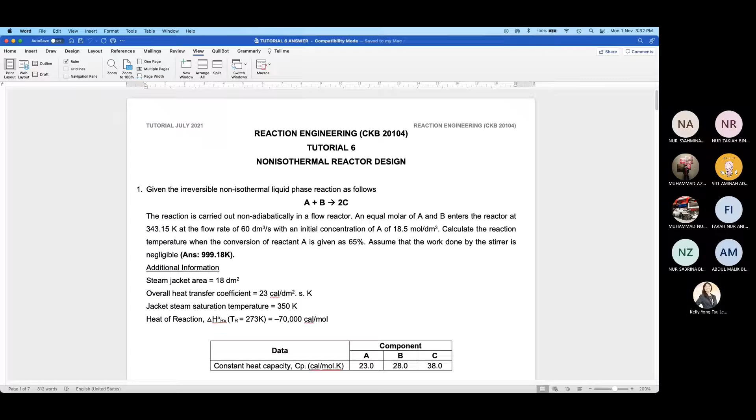This is supposed to be the last tutorial because this is the last chapter with a tutorial. We still have 2 more chapters for me to cover, but chapter 7 and 8 you don't have any tutorial. So this will be the last tutorial, which is tutorial chapter 6.

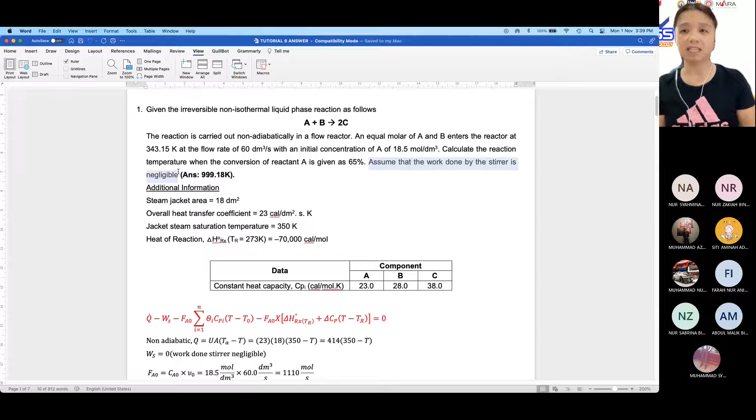Then they say assume work done by stirrer is negligible. As I told you, in the energy balance equation there's a part for work shaft, which refers to the work done by the stirrer. But most of the time the work done is relatively small compared to the other variables, so most of the time work done by stirrer, WS, we consider as zero or negligible.

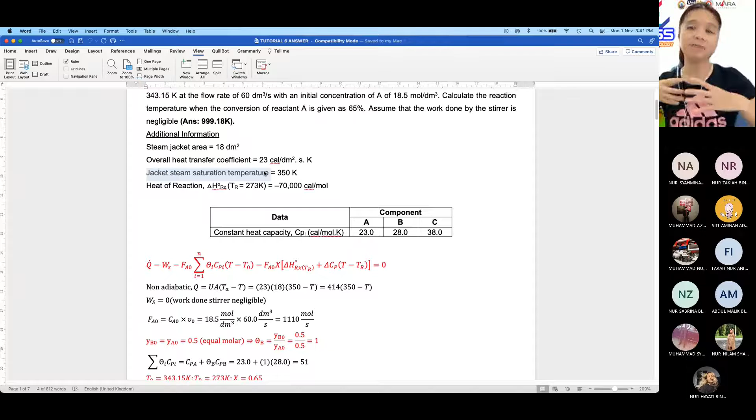Next, heat of reaction. As I've told you before, every reaction will have what we call heat of reaction. Heat of reaction depends, it can be negative or positive, depending on whether it's endothermic or exothermic reaction. So if you see the value of heat of reaction is negative, don't be surprised, it means in this reaction it's exothermic. If it's endothermic, the heat of reaction is positive.

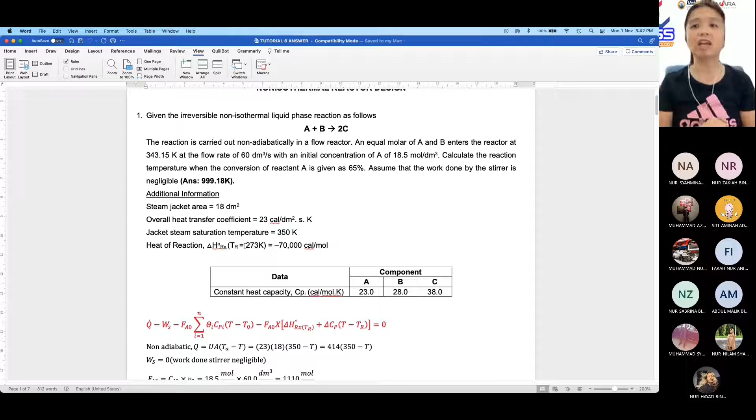And then they give us heat capacity, heat capacity A, heat capacity B, heat capacity C. So how do we solve this question?

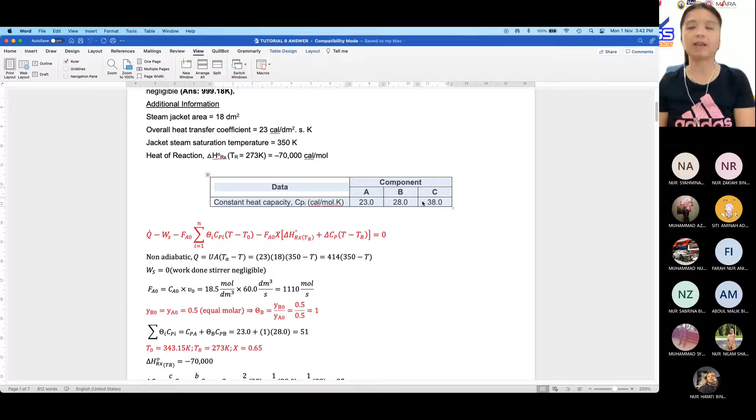As I always tell you, sometimes when you look at reaction or any other engineering subject, the challenge is we don't know where to start, which is very normal. As I said, you need to always know what equation is related, that will be your starting point for how you want to calculate. Especially for reaction questions there's a lot of information, so it becomes very confusing when you don't know what this information is for. So always focus on what they want to find.

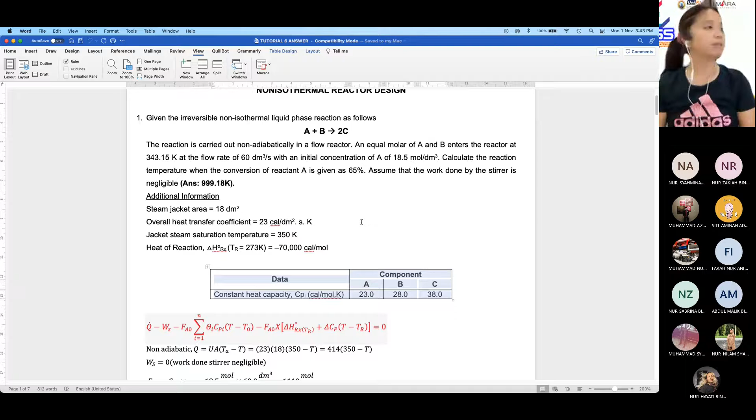And if you realize, in chapter 6 there's only one equation, which is our energy balance equation given in this red form. So let's say you guess this should be the equation. Then after you write the equation, remember what it's asking for - it wants the reaction temperature, T.

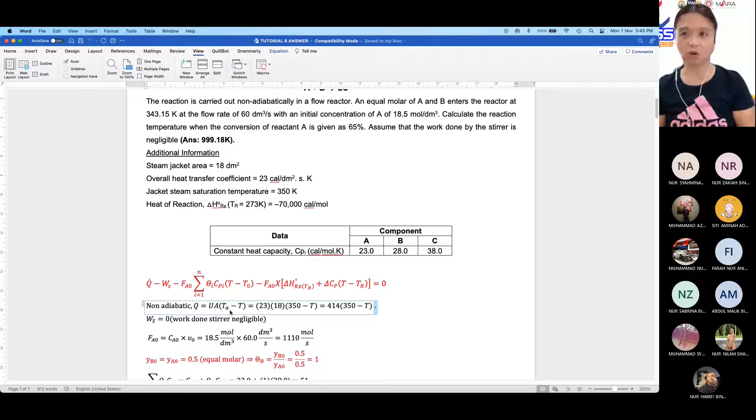U is our heat transfer coefficient of our steam. A is the steam jacket area. T is the reaction temperature. So that means we know U is 23, A is 18, TA is 350 - the jacket steam saturation temperature is our TA. T we don't know, T we need to find - the reaction temperature. So we leave T as it is.

So if you wonder why it's UA in bracket TA minus T - why heat transfer fluid temperature minus reaction temperature - it's because heat transfer is never 100% efficient. So let's say you want your reactor temperature to be 100 Celsius - your heat transfer fluid won't also be exactly 100 Celsius. It will definitely be slightly higher, because there will be loss of heat or loss of energy. So the heat transfer fluid temperature will always be higher than the reaction temperature that you targeted or want to know.

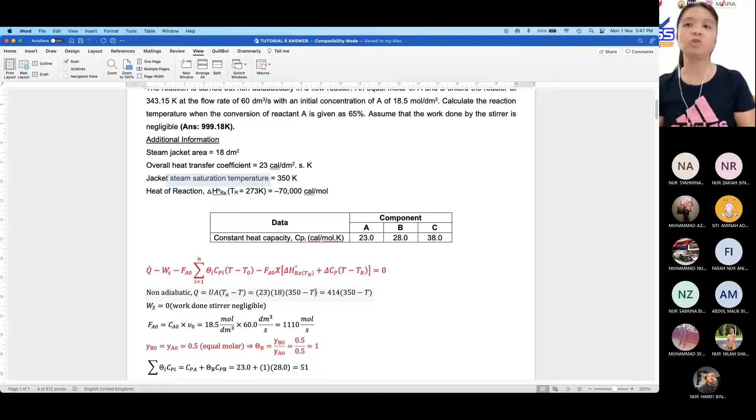So if I were you, I would solve certain parts first, but I would not open the bracket. I understand that sometimes we tend to open the bracket, but if I were you, don't open the bracket first - leave it. Leave the Q part in this form first.

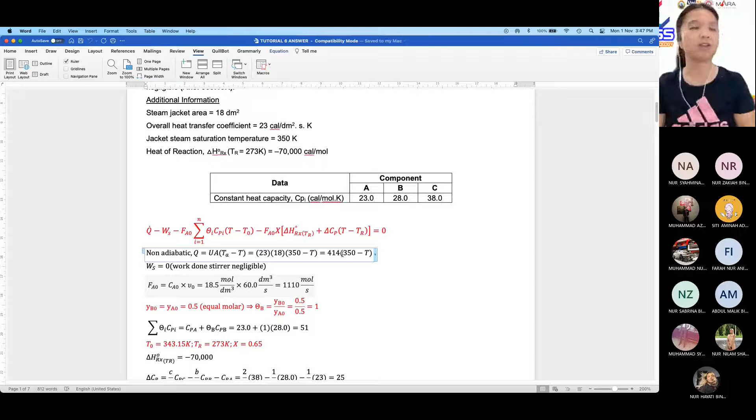So then next, WS - work done by stirrer in this case is negligible because the question says it's negligible. So WS is 0. But even if it's not negligible, in the question, if I were to set a question, I would just give you the value straight away. There's no calculation, no equation to calculate WS. So next, FA0.

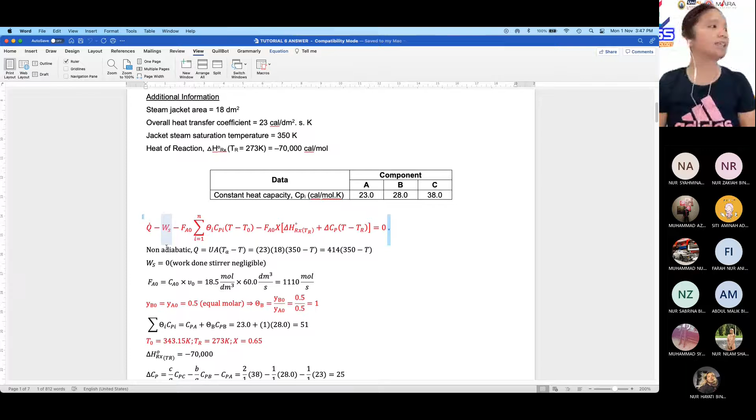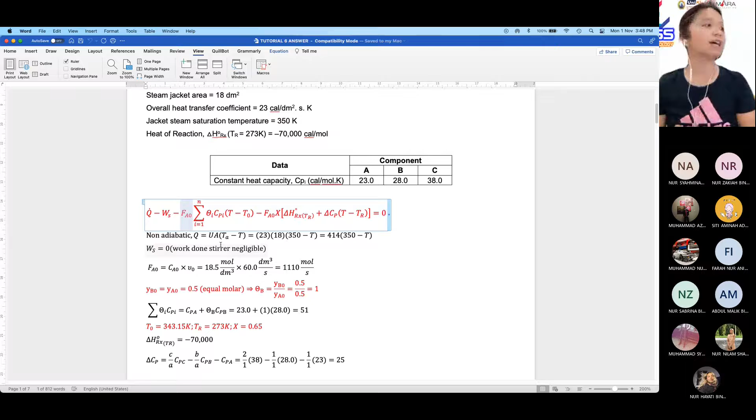FA0 dia tak bagi straightforward kan, dalam soalan dia tak beri kita molar flow rate A. However, I can still find molar flow rate of A, initial molar flow rate of A, if I know Ca0, initial concentration of A, which I'm given 18.5. I'm also given inlet volumetric flow rate, which is 60. So kalau tak tahu FA0, but kita tahu Ca0, kita tahu V0, we can still calculate FA0. So you will get 1110 mole per second. So done.

Okay, so kita kena pergi part by part, right? So next one, summation theta I CPI. I kecil tu referring to the species. Kejap saya buat besar sikit, macam kecil sangat lah. Okay, so this I, summation theta I CPI, the I is not referring to inert, it's referring to the species.

Okay, I itu merupakan species yang ada dalam your reaction. However, you can remember, to calculate theta I CPI is only for reactant only, for the species of reactant, and if you have inert. You don't need to include product in the calculation of theta I CPI.

But let's say you are confused, nak kena masuk ke tak pernah masuk, kamu just ingat, saya selalu ajar kamu pasal theta kan, we use a lot of theta in calculation kan, biasanya kita cari theta B, kita cari theta inert. Okay, either theta B ke theta inert pun konsep dia adalah initial amount. Kalau theta B, initial amount of B over A. Kalau theta inert, initial amount of inert over initial amount of A.

So maksudnya dia sentiasa akan melibatkan initial amount. So kalau produk, kamu dah tahu konsep logik, initially takkan ada produk kan, hanya ada reactant dan kalau ada inert. So you straight away know calculation theta I CPI ni only refers to reactant and if you have inert.

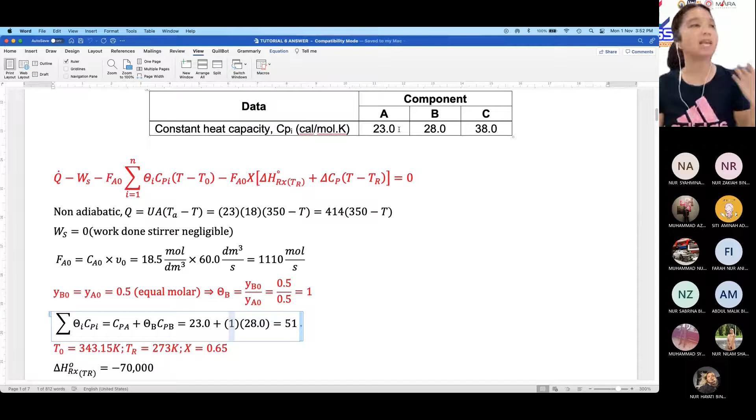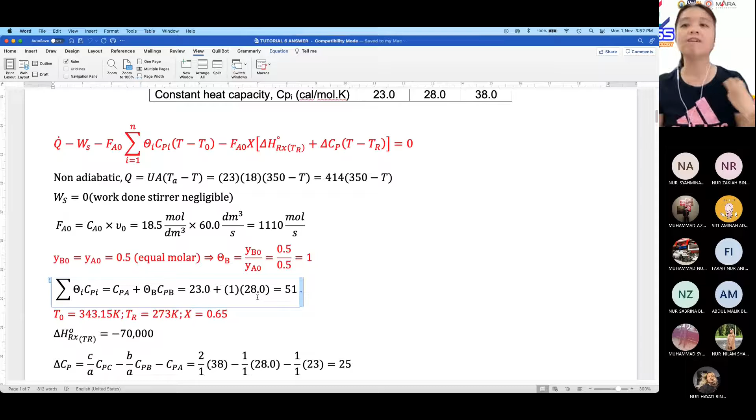So we know that we can replace theta B as 1 and then we write heat capacity of B. Mana dapat? Daripada table lah. So daripada table we see, right? Cp for A is 23. Heat capacity at constant pressure, CPA is 23, CPB is 28. So that's why we put it as 23 plus 28. So theta B to be very careful. Sometimes we might make some mistakes when we want to calculate the value. Okay, so done on summation theta I CPI, done.

Okay, then next, dalam bracket T minus T0. So T kita nak cari. So T tu kita biarkan. T0 is the inlet temperature, which is feed temperature, which is 343.15 Kelvin. So done. Okay, so belakang pula minus FA0, kita dah calculate tadi. FA0 we already know. X given as 0.65, 65%. So X kita dah tahu.

Alright, so next is delta bracket heat of reaction at reference temperature. So heat of reaction dalam soalan ni, you are very lucky we are given straight away. So kita ganti terus, negative 70,000.

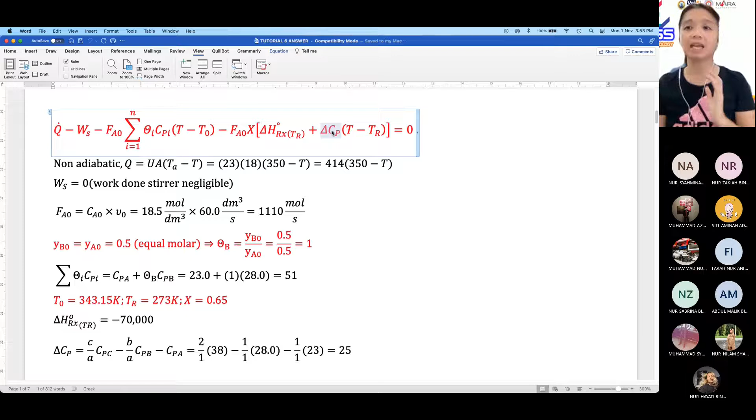Dan last part, delta CP. Delta CP ni kamu jangan lupa, delta dalam matematik tu means changes. Saya always associate, kalau changes tu mesti ada perubahan, perubahan tu mesti ada positif, mesti ada negatif. So positive tu always refers to product, negative always refers to reactant. Whenever you got calculation and you are confused, plus atau minus, bila ada product dengan reactant, you just remember product mesti positif, reactant mesti negatif.

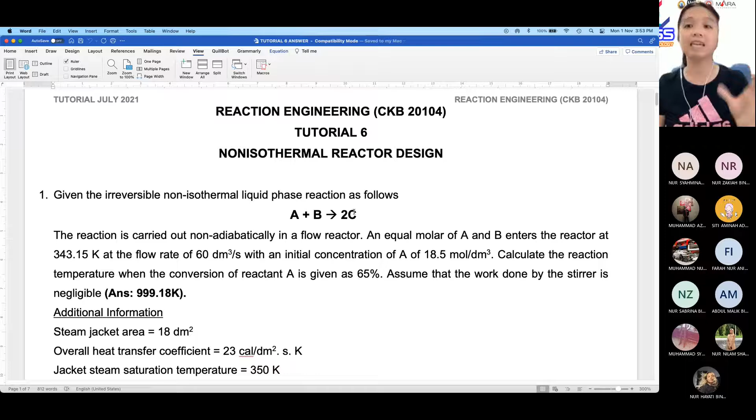Meaning delta CP is written as, jangan lupa stoichiometric coefficient punya ratio tu kena ada. So C per A, heat capacity of C. Dalam kes kita ni produk dia C, reactant dia A and B. So C per A, heat capacity of C, minus B per A, heat capacity of B, minus A per A, heat capacity of A, just like A per A itu 1.

Then don't forget, kenapa negatif untuk B? Sebab B is a reactant in this example. So untuk case B ni yang kamu kena betul-betul tengok. Kalau B tu adalah produk, dia jadi positif. Kalau B adalah reactant, it becomes negative. So that part yang you have to be a little bit careful.

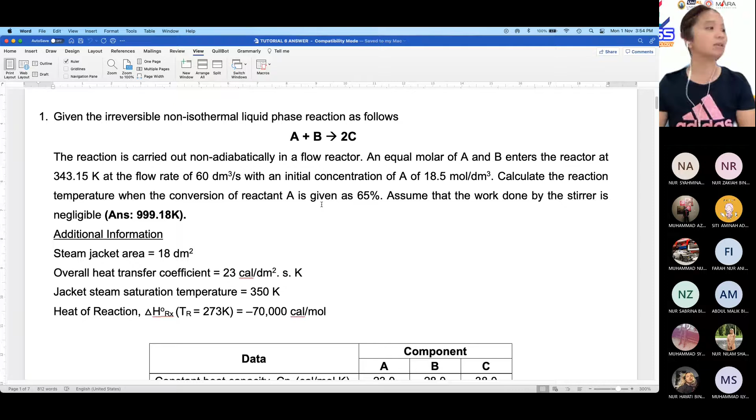Okay, then you calculate accordingly, please check your stoichiometric coefficient. Contohnya dalam kes ni, C per A kita adalah 2/1 because in the equation, A reacts 1A, 1B and produces 2C. So C per A kita sebenarnya adalah 2. Okay, the rest tengok heat capacity A, heat capacity B, heat capacity C.

Now that you have known every unknown, setiap unknown ni kamu dah solve kecuali temperature, then only you substitute into the main equation. So kamu kena solve equation ni. Nanti bila kamu ada masa, please practice on your own sebab equation ni pun dia ada banyak bracket, sub bracket, and so you have to be very very careful.

Lagi-lagi dia ada negatif, dia ada positif. So sometimes if you are not too careful, you might make mistakes, and students tend to make mistakes bila dikira part ni. So rugi lah, kamu dah tahu semua benda tapi kamu terkira salah, you dapat nilai yang salah, it's a bit rugi sebenarnya in my case. Okay, so ultimately you get the temperature as 999.18 Kelvin.

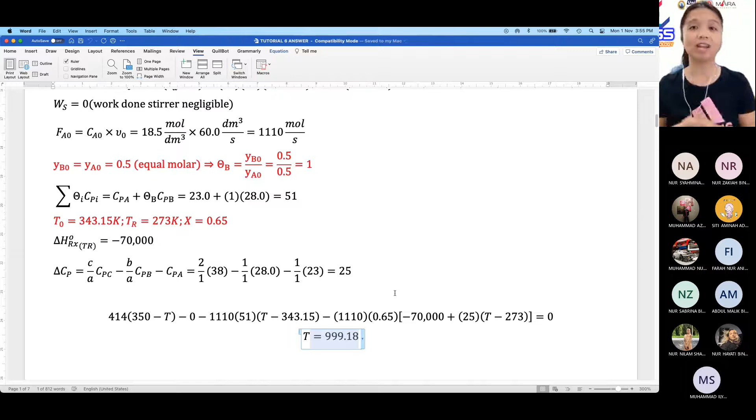Okay, so done for question number 1. Question number 1 is straightforward, dia just guna energy balance equation. Kita tak libatkan lagi sebarang design of reactor, just the change of temperature.

Okay, let me go to question number 2. Question number 2, the endothermic liquid phase reaction, A plus 2B. Be careful now, it's reacting between 1A, reacting with 2 of B to produce 1C. This is carried out in a single steam jacketed CSTR with an inlet temperature of 300 Kelvin.

Dia kata inlet temperature, tindak balas kita ni inlet temperature dia 300 Kelvin. Inlet of feed means the same, suhu sebelum tindak balas berlaku, which rises to 600 Kelvin during the reaction. Apa maksud ayatnya? Ayat ni kata suhu asal 300 Kelvin tetapi ia meningkat, it rises to 600 Kelvin during reaction, means T not 300, T is 600. Suhu meningkat daripada 300 kepada 600 semasa tindak balas berlaku.

Sometimes I also do this because saya pun actually rasa I'm from sekolah menengah kebangsaan. Sometimes when you see questions, kalau kamu macam tak faham ayat tu, I also do this, sometimes I translate into bahasa Melayu. Kadang bila kita translate bahasa Melayu, pemahaman tu lebih baik. Or any language that you find comfortable, you try to translate and see faham tak ayat tu. So most of the time I also do that, sebab saya pun dulu sekolah Melayu, I'm also from sekolah menengah kebangsaan, I tend to do that, I translate to BM, then I have a better understanding.

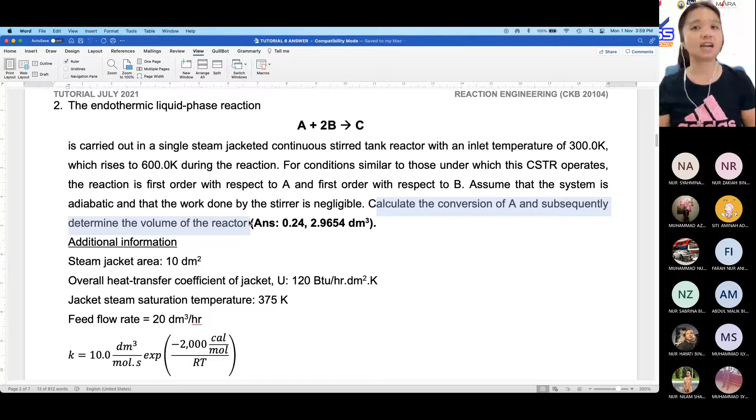Okay. Dan dia kata work done by stirrer negligible. So WS pun kosong, work shaft in our equation is also 0. Calculate the conversion of A and subsequently the volume of the reactor. So dia suruh kita kira conversion X and then dia suruh kita kira volume reactor which is CSTR lah. Volume reactor kita CSTR. Okay, so again sama je konsep.

Kalau soalan nombor 1, in the previous question, they give us conversion, they ask us to find temperature, the reaction temperature. But as I told you, it can be the other way around. They give you the temperature, the reaction temperature, they want us to find the conversion. So the questions can be either way, give T find X, or give X find T. So this question, they give us T, they want us to find X.

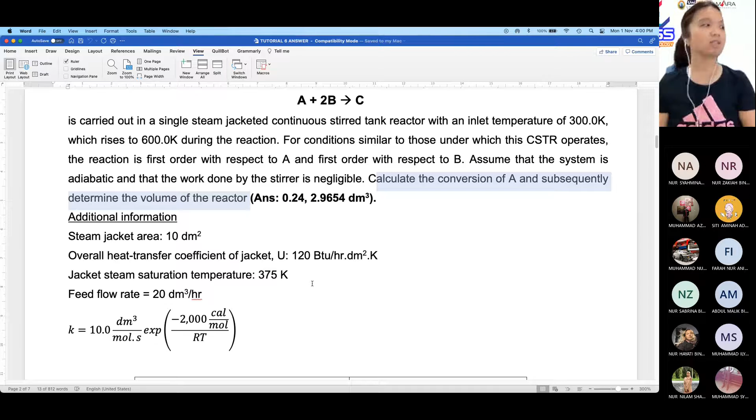So again, we start with information. The first 3 information ni technically tak payah guna lah sebab ni information untuk cari yang Q. But since adiabatic, Q is 0, no longer needs this information. So kita dah letak ke tepi.

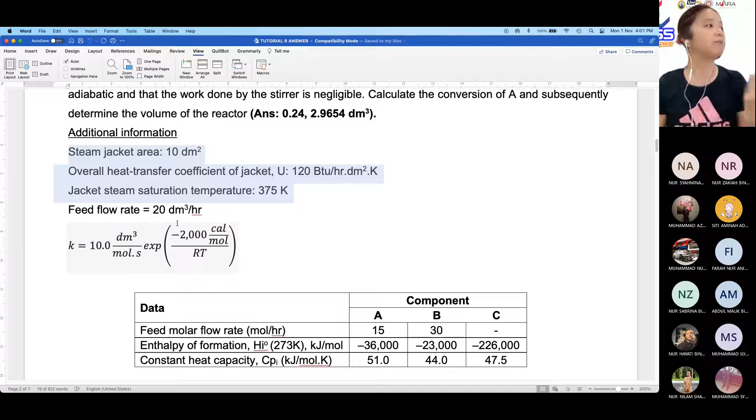Next, dia bagi kita feed flow rate, feed flow rate is 20 dm³ per hour, this is the volumetric flow rate. Sama case. Like I said, dia beri kita feed volumetric flow rate, tapi sama je sebab this is liquid phase. So even though dia bagi kita feed ke, dia bagi kita outlet ke, sebenarnya sama, is still 20 dm³ per hour. And next, dia beri kita value of K, but the K is in the form of Arrhenius equation.

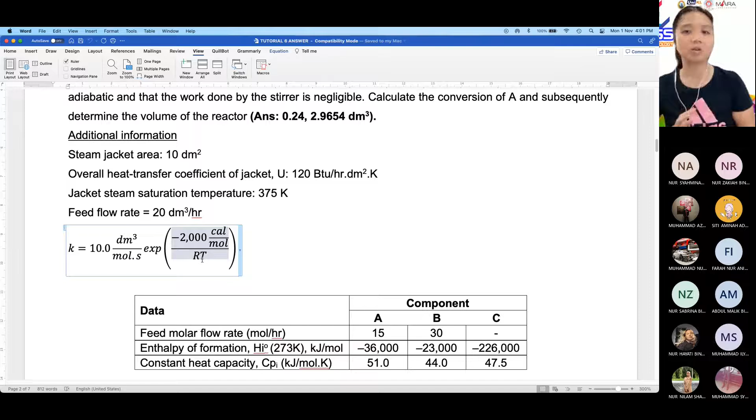Kalau kamu perasan, dia beri kita K, tapi K dalam bentuk Arrhenius equation of which K equals to 10 dm³ per mole second, exponential minus 2000 calorie per mole per RT. Dia beri kita K tapi K dalam bentuk Arrhenius equation. So next, kita tengok table pula.

Dalam table dia beri kita additional data. First, feed molar flow rate, mole per hour molar flow rate lah kan, so this is initial, right? So they give us for A and B. FA0 15, FB0 30. Kenapa ada molar flow rate B initially? Sebab B adalah reactant juga dalam case ni, sebab tindak balas dia A and B to produce C. So we know FA0 15, we know FB0 30.

They give us enthalpy of formation for species A, B, C - you just remember this is to find heat of reaction. In the earlier question they gave us the value of heat of reaction straight away, so we didn't need to calculate. In this question they make it a bit complicated - we have to calculate the heat of reaction using the enthalpy of formation given for each species.

They also give us CP - CPA, CPB, CPC. So don't get confused - A, B and C refer to the chemical compounds. In my question I don't use real chemical compound names, I use A, B and C, but it refers to CP of compound A, CP of compound B, CP of compound C.

So again, we will start with the original energy balance equation. This part, we want to find X when we are given T. So every unknown in the equation, you need to find its value first except X. If there's still an unknown value you don't know, you need to find it. Otherwise you can never solve and get your X. So we do it one by one.

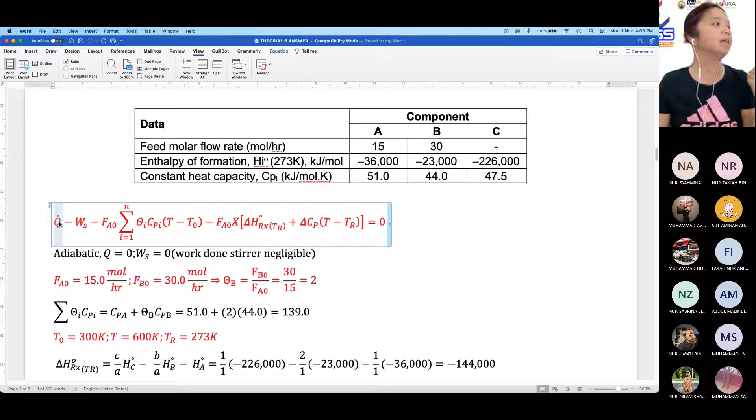Q is 0, adiabatic. WS is 0 because it's negligible as given in the question. FA0 is easy, it's already given in the question - FA0 is 15. So FA0 is settled.

Next, summation theta I CPI. Don't get confused - if you see the summation symbol, summation means total, and if it's a total you must add. Same concept here: summation theta I CPI will be the addition for the reactants. Theta I CPI refers to reactant and inert if you have any. In this case there's only reactant A and reactant B, no inert. So it's CPA plus theta B CPB.

Now the question is how to find theta B. In the previous question they gave us mole fraction, but this question doesn't give us mole fraction of A and B, we don't know that. But what do we have? We have the initial molar flow rate of A and B - we know FA0 is 15, FB0 is 30.

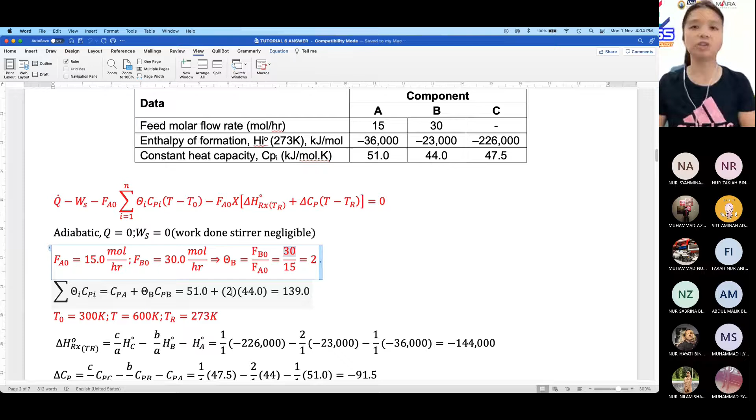So even using the initial molar flow rate we can find theta B. Theta B equals FB0 over FA0, so you just do 30 divided by 15, you get theta B as 2. So you substitute theta B as 2, replace CPA, replace CPB, and you get your summation theta I CPI as 139.

Okay, done. Next, T and T0. T is 600 Kelvin, T0 is 300 Kelvin as given in the question. FA0 is still the same. X we want to find, so X is left unknown. The back part is heat of reaction at reference temperature.

So heat of reaction at reference temperature - in the first question it was given directly. In the second question it's not given directly, but we can calculate using the heat of formation of each species.

Heat of reaction, if you notice, has a delta - from the triangle symbol, delta means changes. So there will be positive and negative terms. In this case it refers to positive for the heat of formation of the product, and negative refers to the heat of formation of the reactant. And there's a stoichiometric coefficient, so it becomes C per A heat of formation of C, minus B per A heat of formation of B, minus heat of formation of A.

So for part B, be very careful. In this question, B is a reactant, that's why it's negative. But if there's a question where B is a product, you need to understand that it's no longer negative B per A - it becomes positive B per A heat of formation of B. This is the part where students sometimes make mistakes - when the question changes slightly, they forget that it must be positive if B is a product. In this case, B is a reactant, that's why you get negative. Don't forget about the stoichiometric coefficient.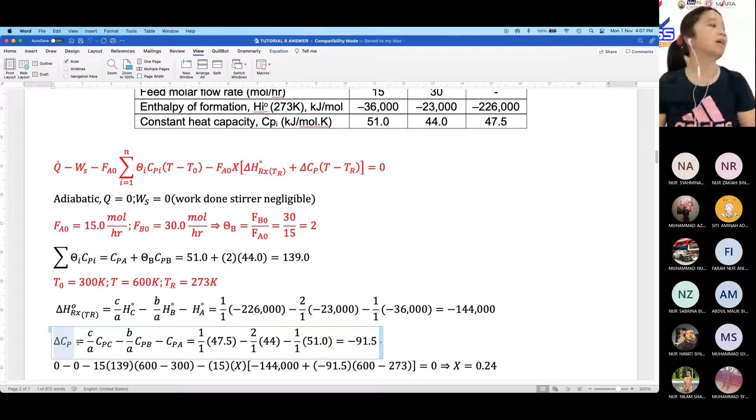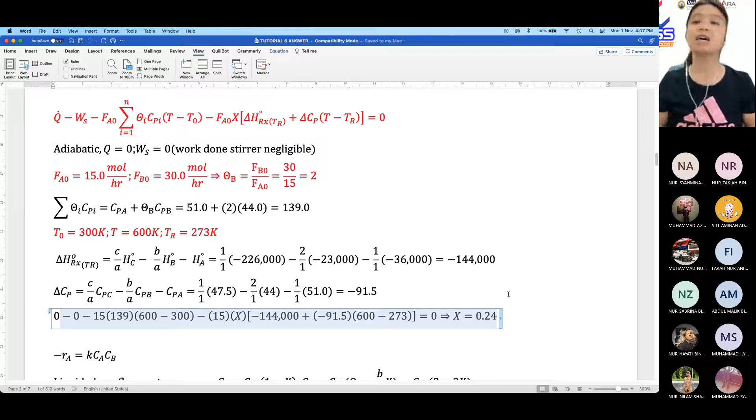So you get your delta CP as negative 91.5. Same concept, semua benda dalam persamaan tu kamu kena ganti. You replace everything with your sub equation as shown here. You will get your X as 24% or 0.24, means your conversion is very low.

It's only 0.24. So soalan ni pun I don't think it's that difficult, tapi dia ada parts pengiraan. So kamu kena be very careful, if satu part salah pun jawapan akhir kamu confirm mesti salah. This question is a bit dangerous in terms that if let's say one sub equation kamu kira salah, confirm jawapan akhir X kamu tu confirm akan salah. Dan part yang bawah definitely reactor design pun akan salah.

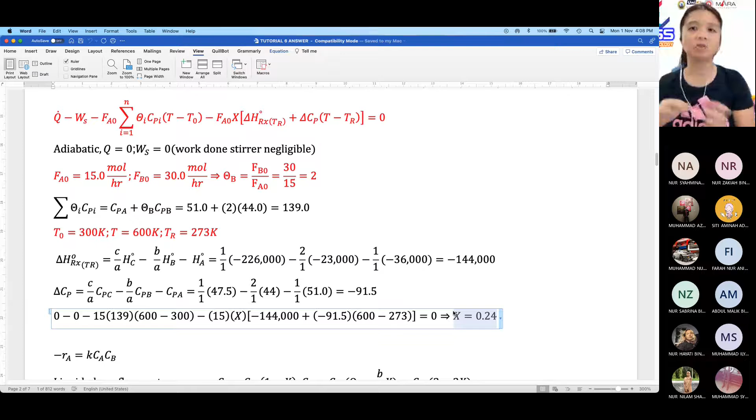So don't do this kind of mistakes. Okay, done. Okay, so next we go - dia nak kita cari volume of the CSTR.

Macam mana cek volume CSTR? Volume CSTR dia, kamu kena ingat macam mana nak kira design equation dia. Katakanlah kamu tak ingat, kamu start dengan design equation CSTR to find volume equals to FA0 X per minus RA. This is for single reactor. Minus RA dalam soalan dah diberi, minus RA dia sama dengan K CA CB.

Sekarang untuk case CSTR kamu ada option sebab ni bukan integral equation. Kamu boleh sebenarnya kira CA dulu, kira CB dulu, ganti dalam equation pun boleh, ataupun dalam case saya kembangkan dulu, saya masukkan dalam baru saya ganti dengan nilai pun boleh. So what do I mean by that?

CA ni, okay, kalau I remember I taught you, kalau liquid phase concentration CA is expressed as CA0 1 minus X. Ni dalam chapter 3 kalau kamu ingat saya dah express kalau liquid phase CSTR ataupun flow reactor, CA equals to CA0 1 minus X. Kalau CB kamu kena berhati, dalam kes ni CB adalah reactant. So CB equals to CA0 in bracket theta B minus B per A X.

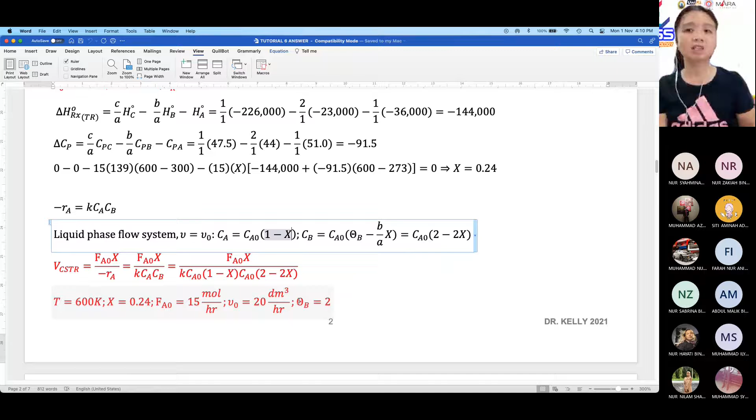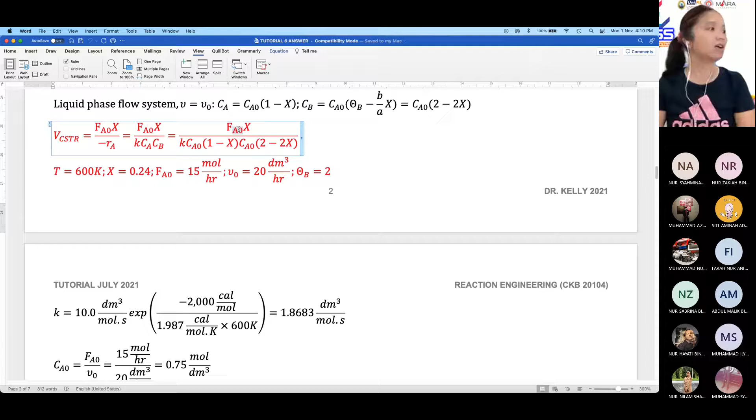Okay, so now that you have everything already, then kita ganti dengan nilai. So you do one by one. First of all, FA0 - kamu dah tahu lah kan dalam soalan FA0 dah beri dalam table. FA0 is 15 mole per hour.

Saya buat one by one. FA0 15 daripada soalan. Okay, then next X - kita dah tahu X daripada part yang the previous part we already calculated X. So X is 0.24. So done, ganti X.

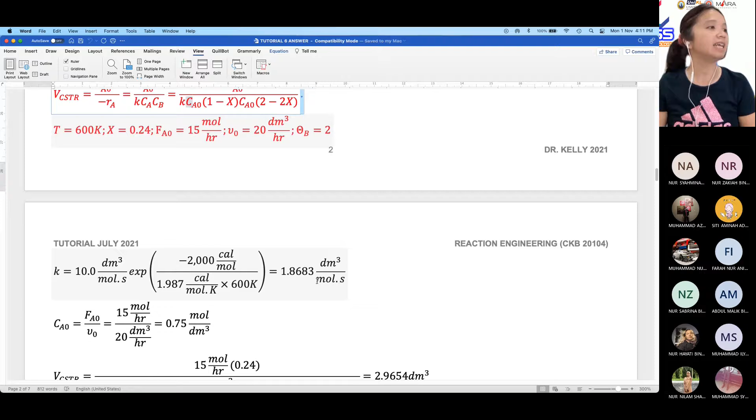Next one K, okay, so cari K. Dalam case ni K is not given to us directly, tapi dia beri kita K dalam bentuk Arrhenius equation. Now that we know the reaction temperature is 600 Kelvin, okay, and then R kamu gantilah dengan 1.987 because EA kita calorie per mole.

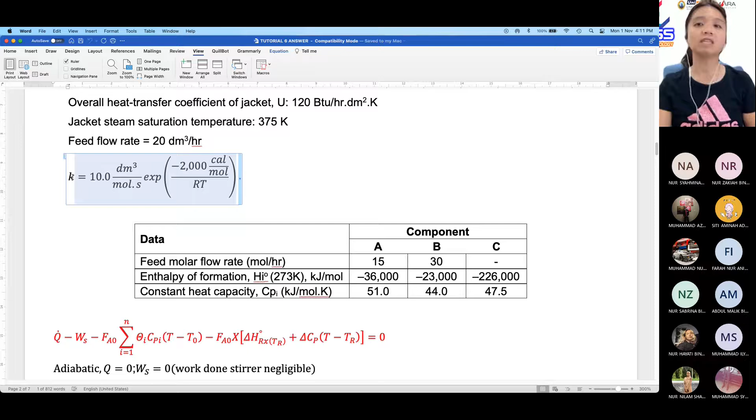So R we choose 1.987. Kalau kamu confused mana muncul equation ni, dalam soalan dah diberi nilai K, tapi nilai K ni dalam bentuk Arrhenius. So kita ganti sajalah nilai R 1.987, T with 600 Kelvin. So you get your value of your K.

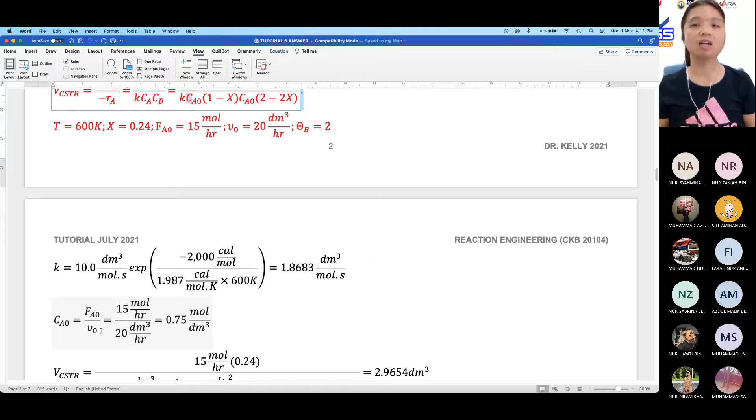So done. So next one CA0. Dalam case ni CA0 is not given but we know FA0 and we know V0, the inlet volumetric flow rate. So kita boleh kira juga CA0 lah using the same way. You get a CA0 as 0.75.

Okay, so the rest ganti sajalah. Dah tahu X, dah tahu the rest, you can already replace the numbers. You will get the volume as 2.9654. So kalau kamu perasan, chapter 6 is not that difficult in comparison chapter 4. In comparison to 1, 2, 3, 4 is quite hard.

Chapter 6 is quite straightforward, tapi dia tak boleh buat salah. Kalau buat salah satu part, memang yang bawah-bawah semua part akan salah juga. Okay, so done for question number 2.

We have about 15 minutes, so I will cover the last question. We have 4 questions, tapi as usual, I will always give you 1 question as a homework, right?

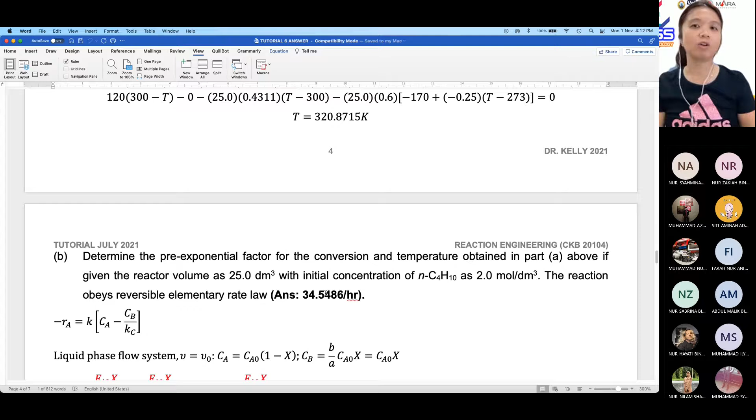So I will leave question number 4 as homework for you. When you have time, you do it. The answer is already in the question on VLE. I will finish question number 3.

Okay, question number 3. Normal butane is isomerized to isobutene. The reaction is carried out non-adiabatically in the liquid phase. So the reaction is isomerization, from normal butane it becomes isobutene. Even though we use a real chemical compound, don't get confused - it's better to just label it A and B. So this reaction, A produces B. One A produces one B. And then it says non-adiabatic.

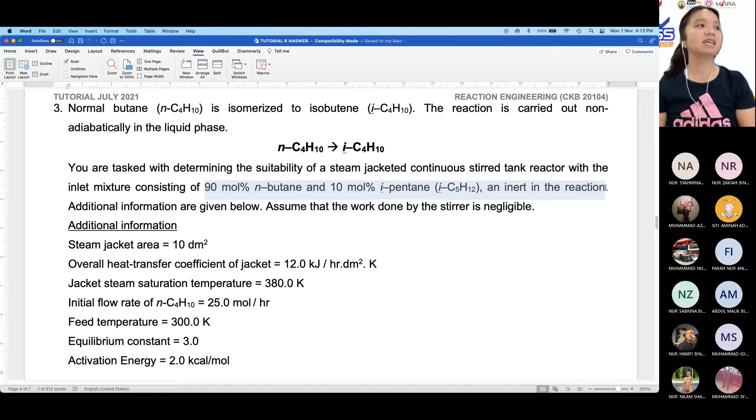If non-adiabatic means Q has a value, we need to calculate the value of Q later in the equation. You are thus determining the suitability of a steam jacketed CSTR with the inlet mixture consisting of 90 mole percent normal butane and 10 mole percent isopentane, an inert. Jacket steam saturation temperature TA is also needed to calculate Q. Initial flow rate given is 25 mole per hour.

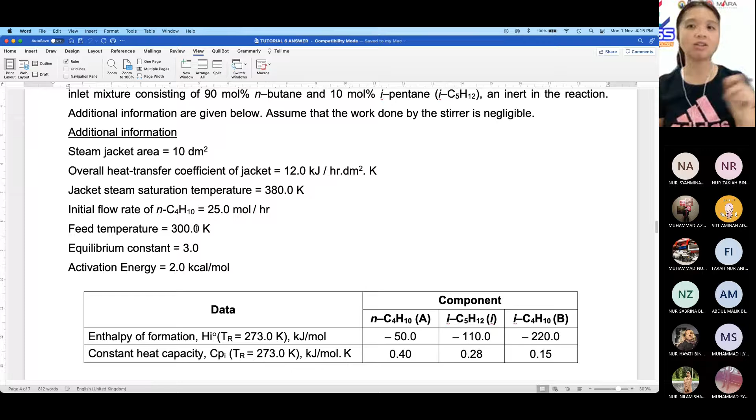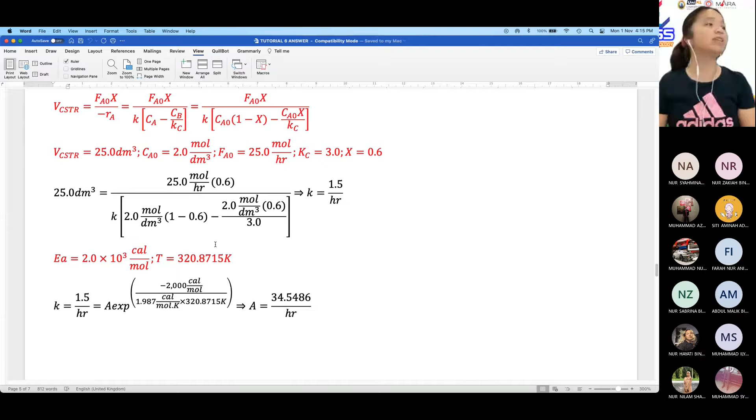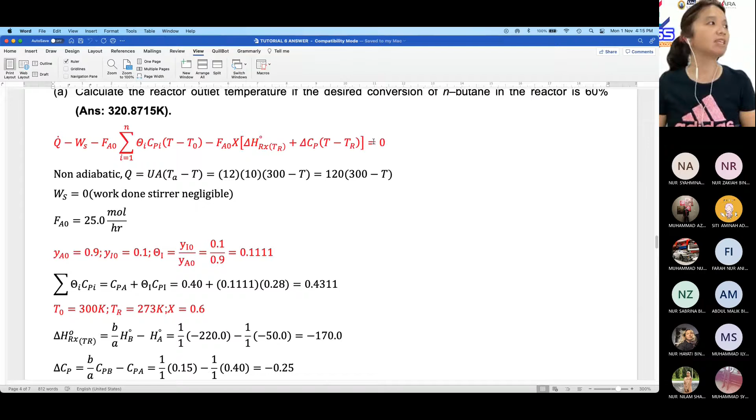Your equilibrium constant - okay, now I forgot to mention, this is, wait, this is a reversible reaction. I forgot, the arrow is wrong. Hold on. Okay so the arrow is wrong, this is actually a reversible reaction.

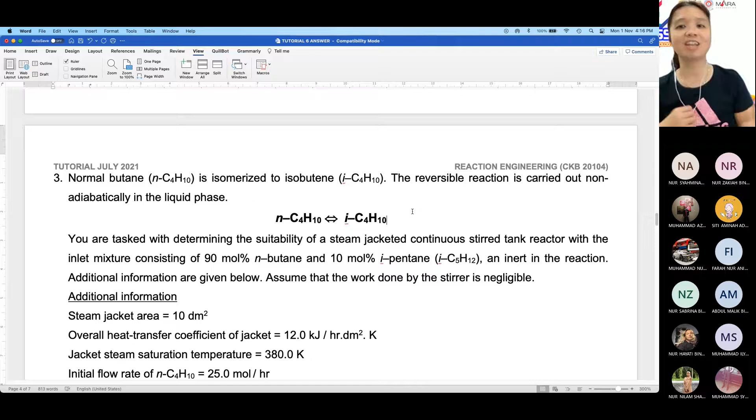Okay, right, so I should write down the reversible reaction better. Sorry, addition to the question, I forgot. I changed this question from irreversible to reversible. So the information is reversible, but I forgot to change the chemical equation to reversible. So this is a reversible reaction, that's why there's an equilibrium constant, that's why when I saw equilibrium constant I got confused since equilibrium constant must mean reversible.

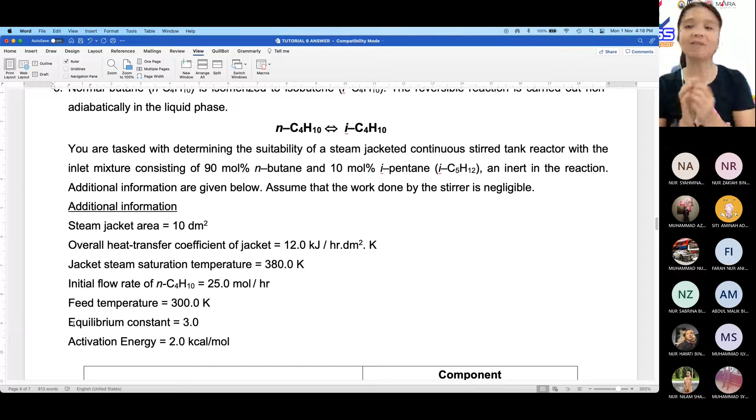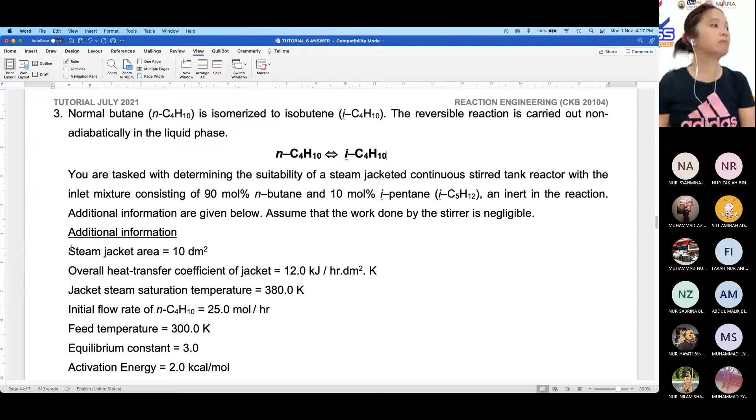Okay, so they give us equilibrium constant. If you forget, equilibrium constant is Kc. Kc only exists when we have a reversible reaction. Why? As I told you, in a reversible reaction, in this case normal butane A, A can become B, and at the same time B can become A again. So the reaction will occur forward, backward, until eventually it reaches what we call equilibrium. At equilibrium state we will have equilibrium constant Kc. So you only see Kc if it's reversible. If the reaction is irreversible, you will never find Kc.

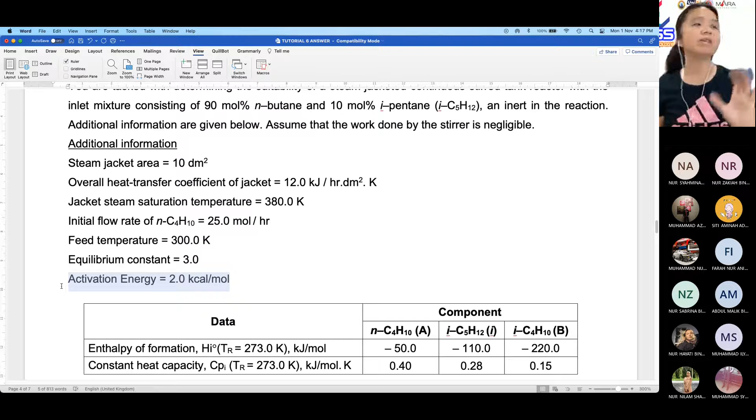And we are given activation energy EA. Whenever you are given EA, you know for sure we need to calculate the Arrhenius equation. We will use the Arrhenius equation, or else we wouldn't have this value. Wait, something is not right here.

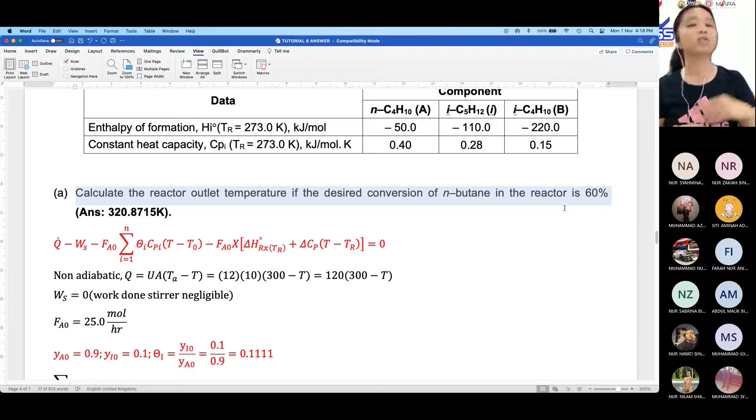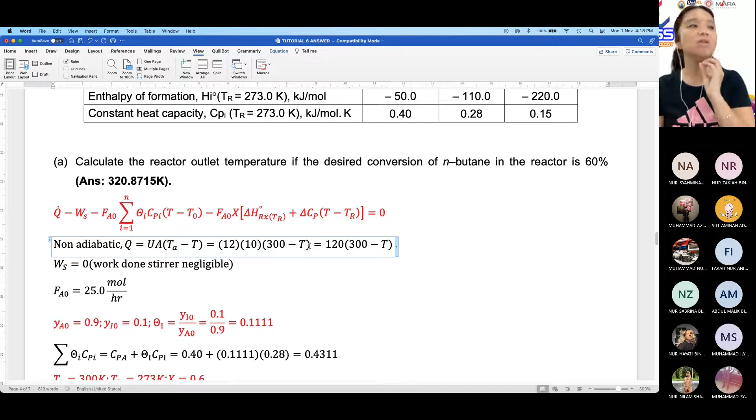Okay, so again we start from the very beginning. First Q - this is non-adiabatic, you need to calculate Q. The equation to calculate Q is the same: Q equals UA times, in bracket, TA minus T. UA and TA we know, you replace with numbers. The T you leave because we want to find T. Okay, so done, WS is 0.

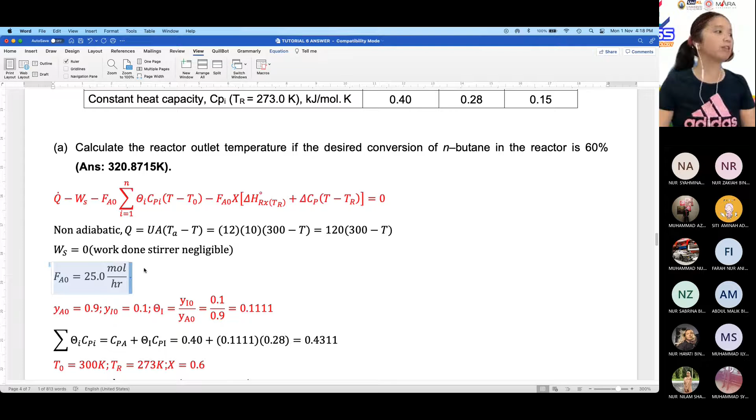FA not given is 25, in the question FA not is 25. Okay, so next is summation theta I CPI. This part you need to be very careful because now this calculation is different from the earlier example. In question 1 and 2, A and B are reactants and we have no inert, that's why theta I CPI equals CPA plus theta B CPB.

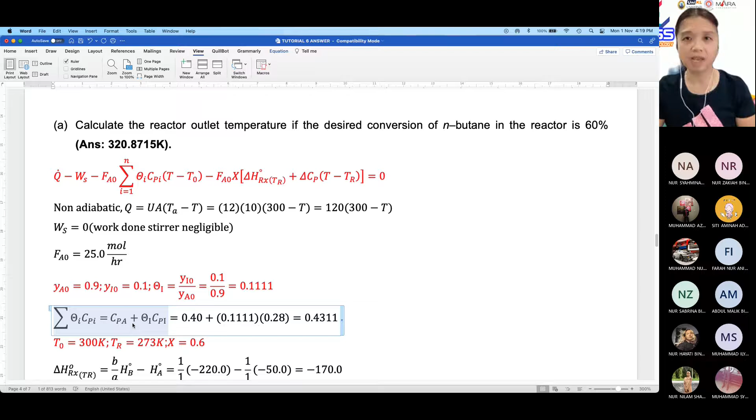In this question number 3, there's only one reactant A. But we have inert. So don't forget if the original has inert, you need to include the inert calculation in theta I CPI. That's why it becomes CPA plus theta I CPI. The I refers to the inert, since in this case we have inert.

So for CPA, you look at the table, CPA you already know, look at the table and take the value. Theta I, to calculate it, uses the same concept as theta B. The concept means initial amount of B, or initial amount of inert, over initial amount of A. Since it's stated initially 90% A, 10% inert, means YI0 is 0.1, you divide with YA0 0.9. So this part you really need to understand well.

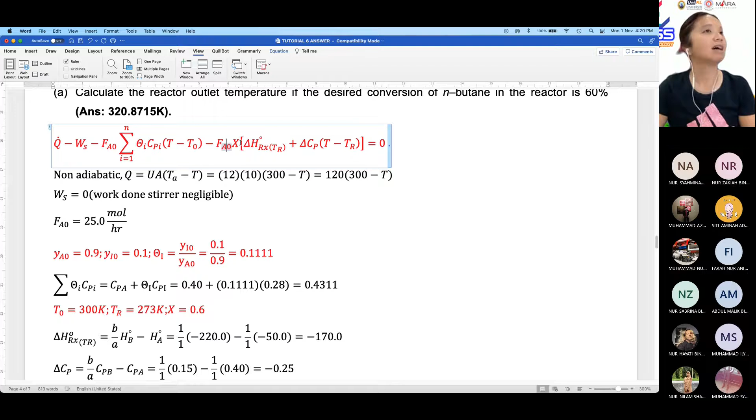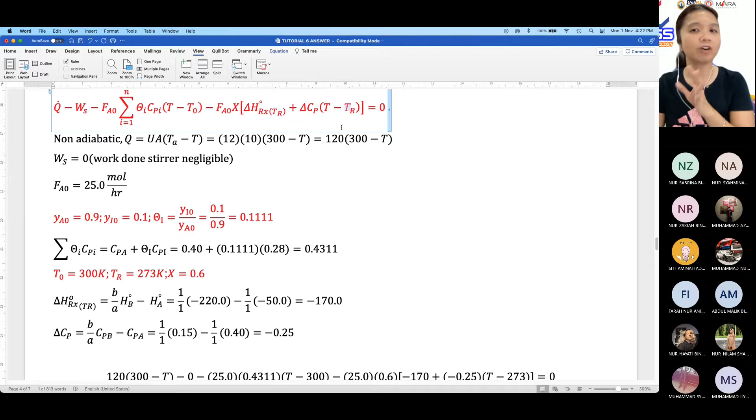And before I forget, I forgot this part behind has TR. T minus TR, TR is the reference temperature, which I forgot to explain in question 1 and question 2. Reference temperature is given in the question. It refers to the temperature at which the data, the heat of formation or the CP, was obtained, the reference temperature. So most of the time the property table in books is at 0 Celsius, which is 273 Kelvin.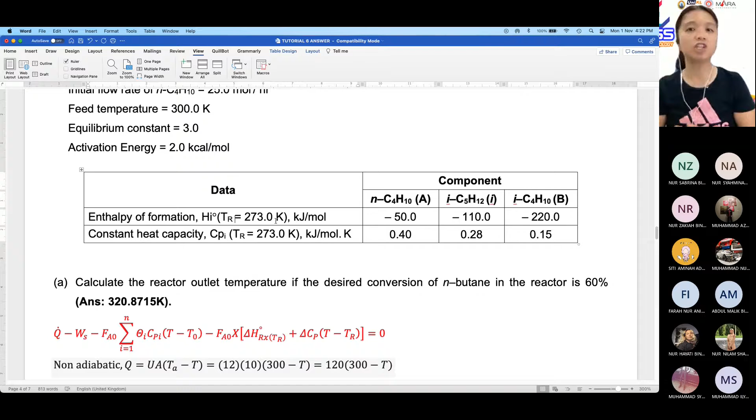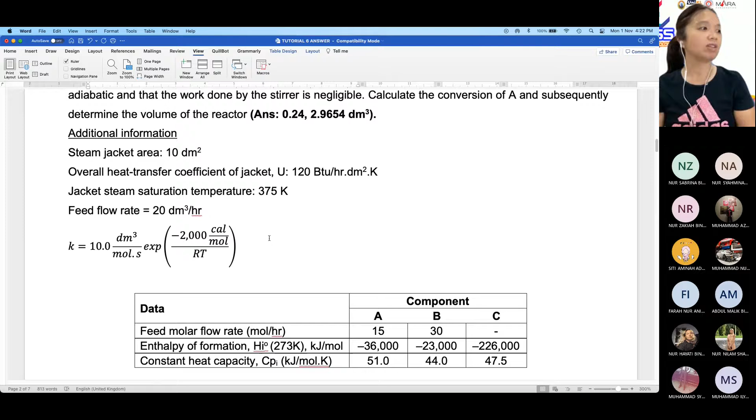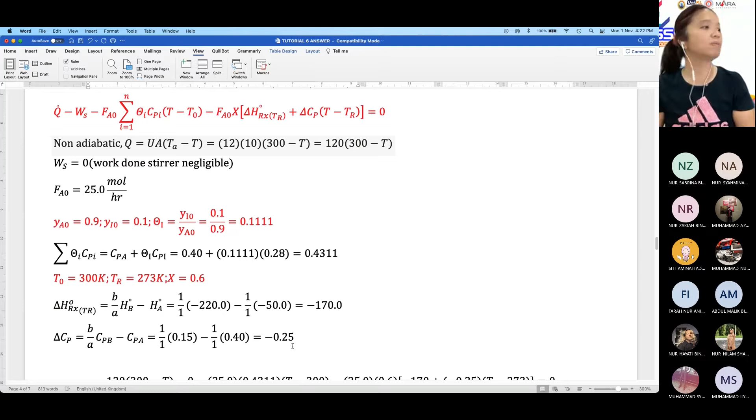So if you want to find TR, just look in the question, it directly gives the value of TR. Even in question 2 earlier, you can find TR is also given. So don't worry about TR, just look in the question, the value given at which reference temperature, that will be your TR value. So with the same concept, once you've obtained everything, substitute into the equation, you will get the temperature of the reaction, which is 320.8715.

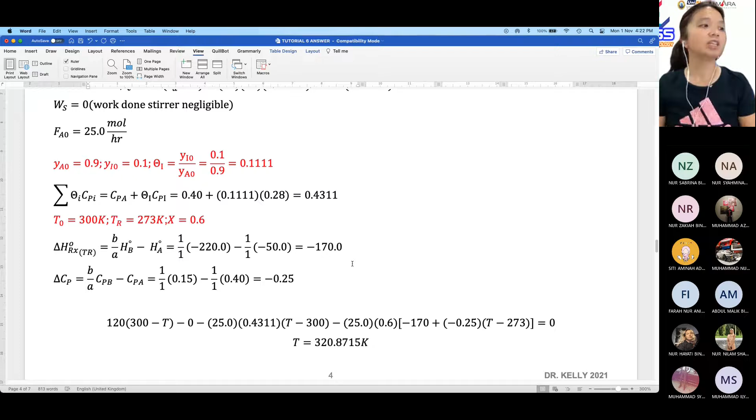Okay, so done. And the last part of the question: determine the pre-exponential factor for the conversion and temperature obtained in part A above. If given the reactor volume as 25.0 dm³ with initial concentration 2.0 mol per dm³, the reaction obeys reversible elementary rate law.

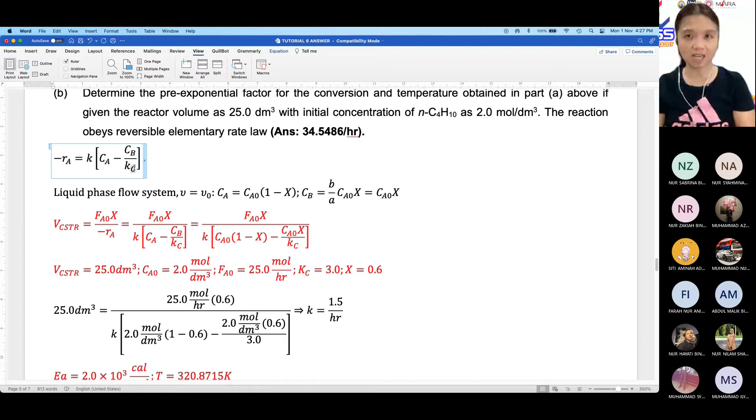Now you replace minus Ra with this elementary reversible rate law, because we want to find K. So to find K, we need to know the volume, FA0, X, Ca, Cb, and Kc.

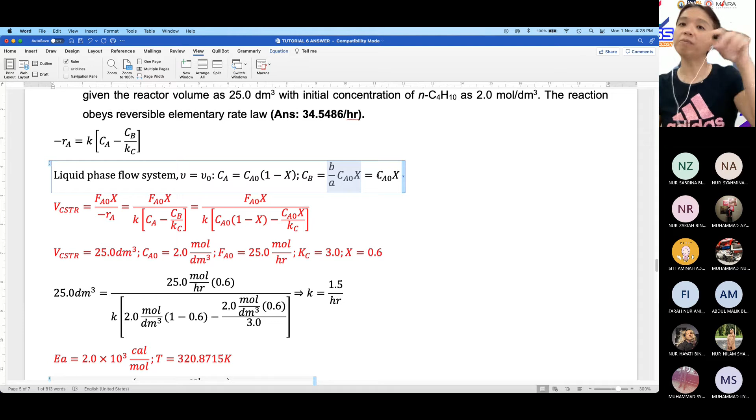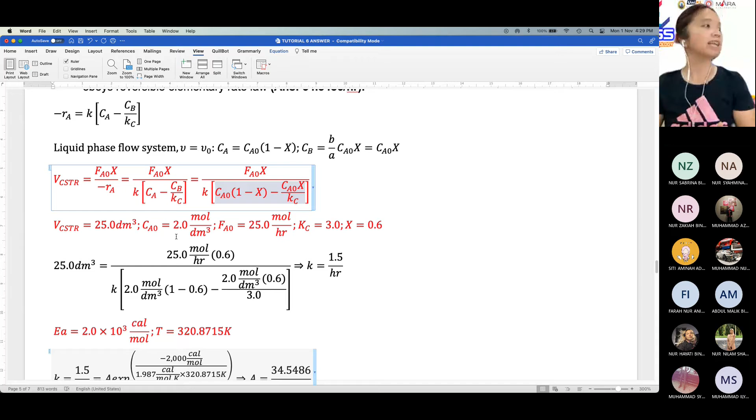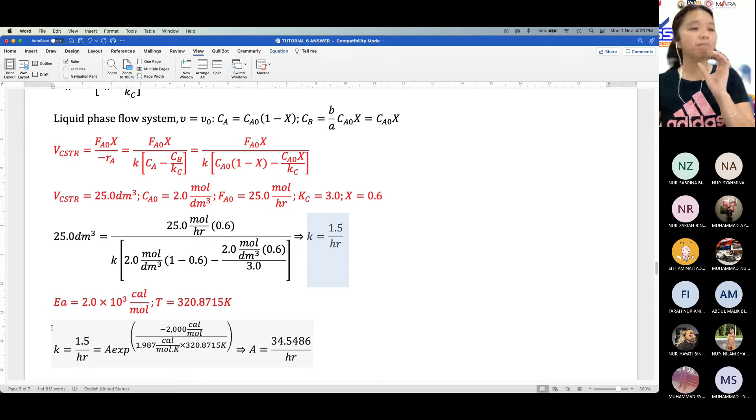So I replace the expressions in the equation first, then substitute the values: volume 25, FA0, X, Ca0, and Kc, and then I get the value of K. Earlier, to substitute into Arrhenius, we didn't have the value of K. So we use the design equation to find K first, then substitute it back into Arrhenius to get A.

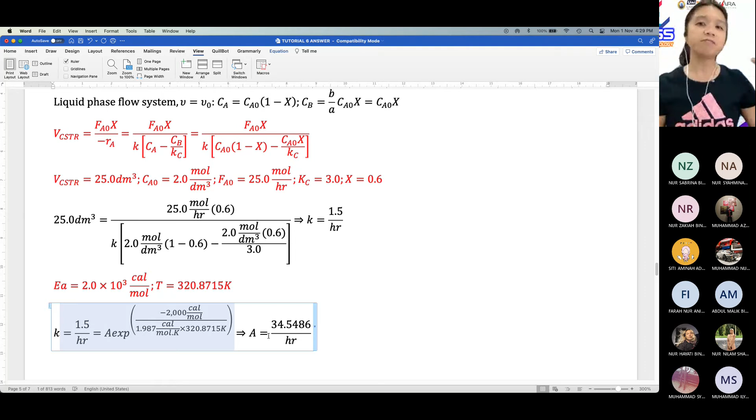So this question is not so straightforward. To get A, you first have to find K. And K you obtain based on the design equation, where knowing the volume, we find K first. This part is a bit harder because the rate law is different here - this is an elementary rate law. So be very careful with that part.

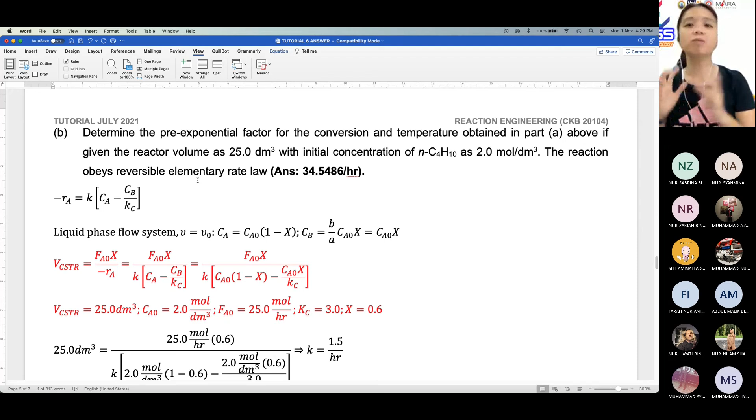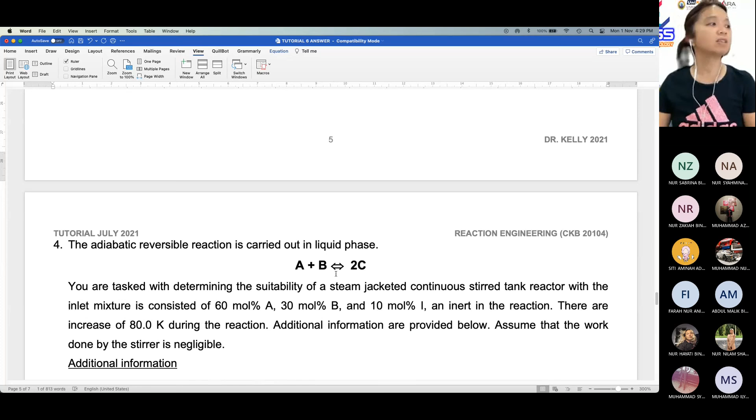But if you solve it correctly, you get the value of A as 34.5486. As I told you, question number 4 is homework for you - please do it yourself. It's also reversible, like number 3. Attempt it to practice and increase your understanding.